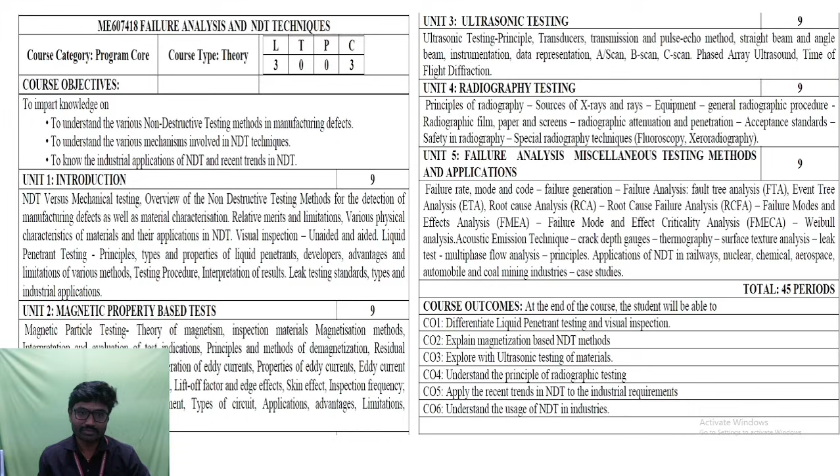Next we'll move on. First of all we'll cover the basic concepts in non-destructive testing, as well as the types of non-destructive testing. In this session we'll focus on two important testings, and in upcoming sessions we will go further by learning other types too. Okay, let's move on to the class.

So what is non-destructive testing? From the word itself we can easily understand it's a testing we do without causing any damage to the material. Mainly these testings are used to evaluate the quality, the integrity, and safety of material components or welds without causing any damage. This is important because mostly we have destructive or mechanical testings, but by overcoming those and as an upgradation, we have non-destructive testing, which we can do without any disruption or damage to the material.

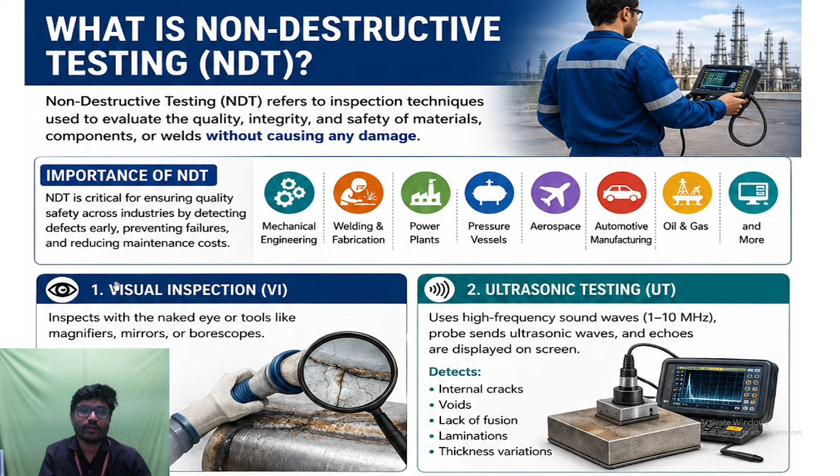This is used in power plants, pressure vessels, aerospace, automotive manufacturing, oil and gas, and many other applications. So mainly, as I told, we are going to focus on the types.

The types we are going to see: first is visual inspection. This is one of the simplest and most economical inspections in NDT, done with the help of our own eye or tools like magnifiers, mirrors, or borescopes. We'll see all these types in detail in upcoming slides, but just presenting them briefly now.

So first we can see visual inspection. From the word itself, we can easily understand that visual inspection deals with our own eye, checking the cracks and pores and how much extension has happened.

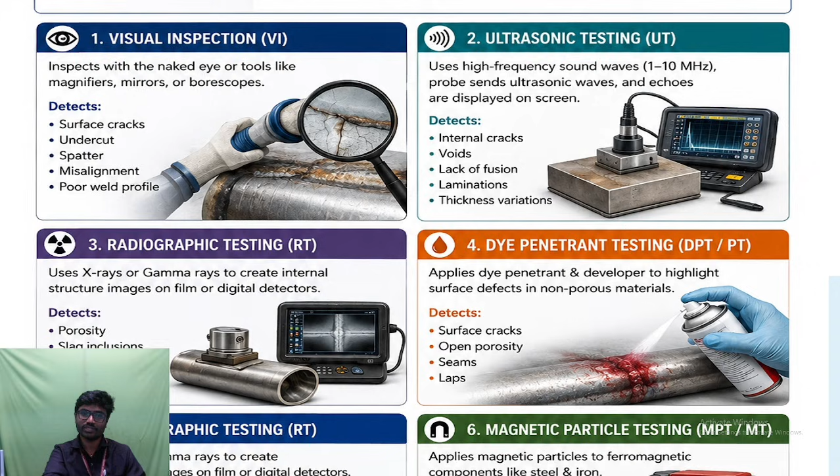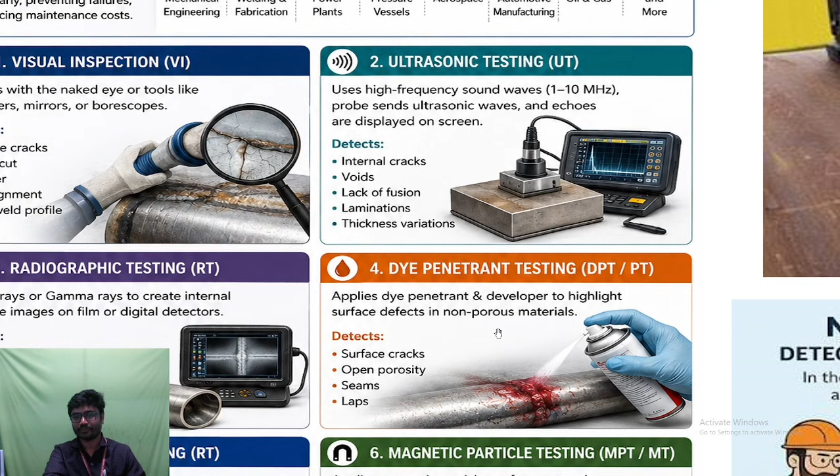So the next type we can see is dye penetrant testing, or we can say liquid penetrant testing - that's the other name for dye penetrant testing. These penetrant testings also we can do similar to the other techniques. Here we are applying some dyes as a liquid penetrant, like the spray you can see here. This is a welded part, and we are applying the spray, and with our naked eye we are seeing any pores or cracks or defects present in this particular welded component. We will see this dye penetrant testing as well as visual inspection testing in detail in the next slides.

Try to understand, we have different types of testing which can be used for different purposes. If you are going for in-depth measurement, like cracks or pores which are not visible on the surface, we can use ultrasonic testing and radiographic testing. If the pores or cracks can be visibly seen over the surface, we can go for visual inspection or use dye penetrant testing. So according to the usage or application, we can use either of the testings for getting proper accurate measurements. Magnetic particle testing is the next testing we are going to see.

This we can understand simply with the help of the word itself - magnetic particle testing. With the help of the magnet, magnetic flux, and magnetic particles, we can detect cracks or defects in the material. This method, magnetic particle testing, can be done only in ferromagnetic materials, not in all components, since the magnetic flux or magnetic field plays a major part. This is one of the disadvantages - we can use it only on ferromagnetic materials.

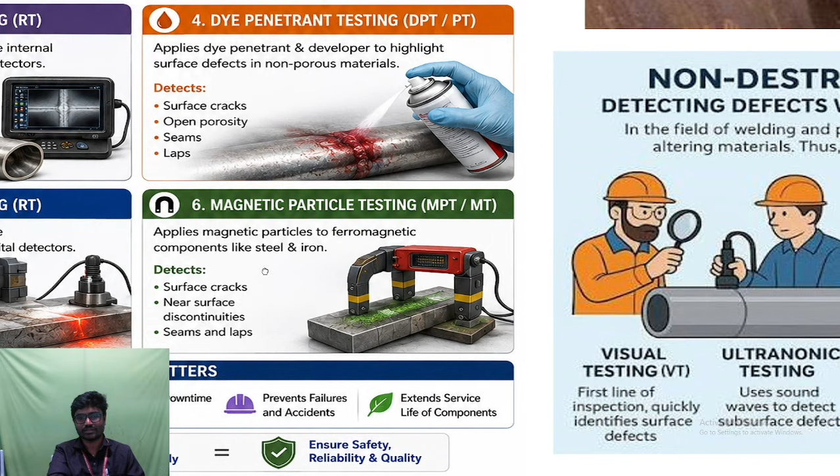So we need magnets and magnetic particles. Sometimes we will use fluorescent particles also for getting much more visibility with the help of UV lights, and we can visualize the cracks or pores in a very accurate way. So for that we use fluorescent particles instead of magnetic particles. These are some of the types of NDT.

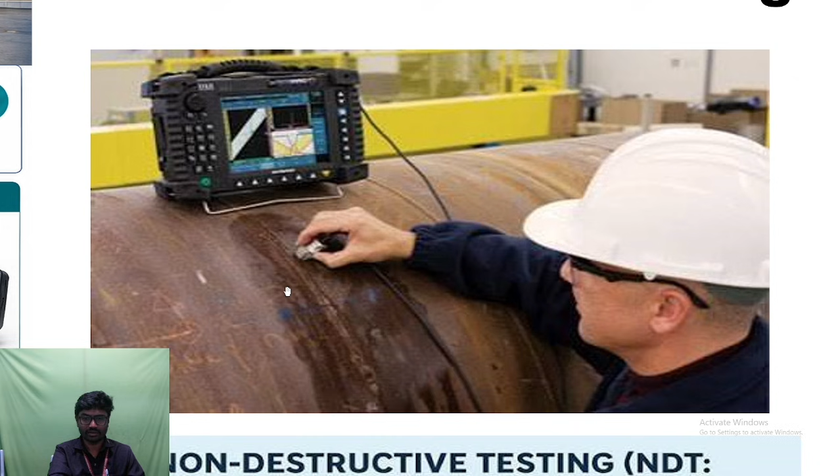Here you can see the example - it's a huge pipe, and there we are detecting with the help of ultrasonic testing. They are using a probe to send ultrasonic waves into the pipelines or metal component. Here you can understand the display is showing every movement of the peaks, how any cracks are present. If the crack is present, the peak will be very high, or the peak distance will be very high. With the help of that, we can understand some crack or defects are present in the component.

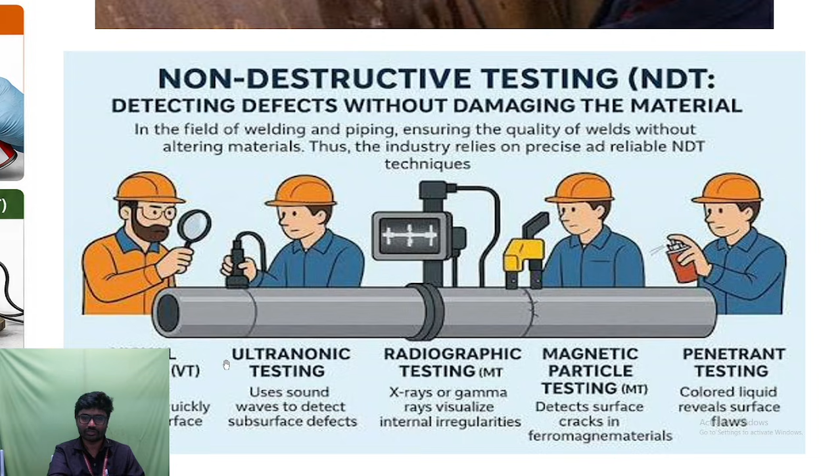So some of the testing we have discussed. As a summary, I can say we have seen visual testing, ultrasonic testing, radiographic testing, magnetic particle testing, and dye-penetrant testing. So I'll move on to the next slide.

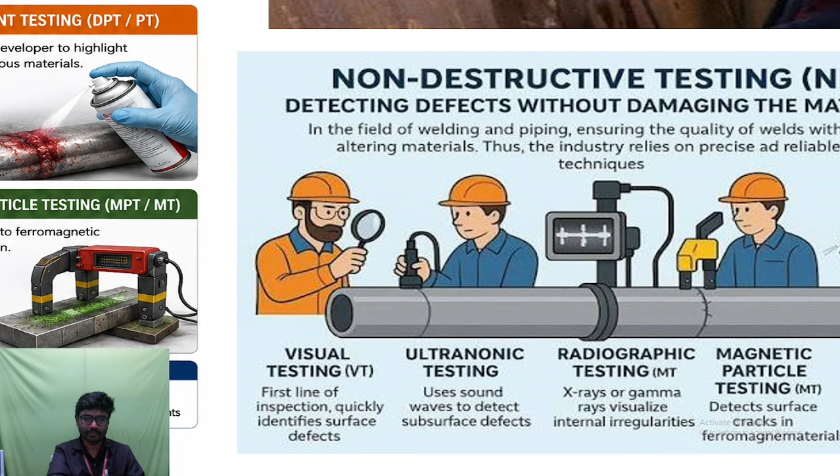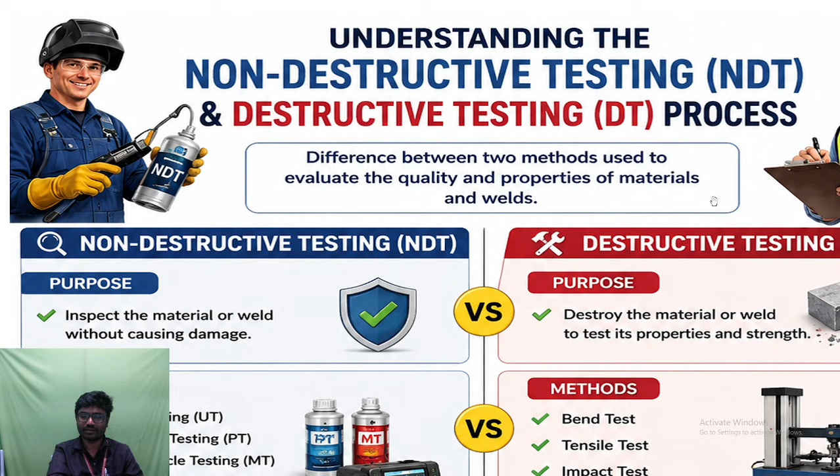So we'll see now what is the difference between mechanical testing and non-destructive testing, or either name we can give, like mechanical testing can be called destructive testing too. What are the differences? We can see one by one.

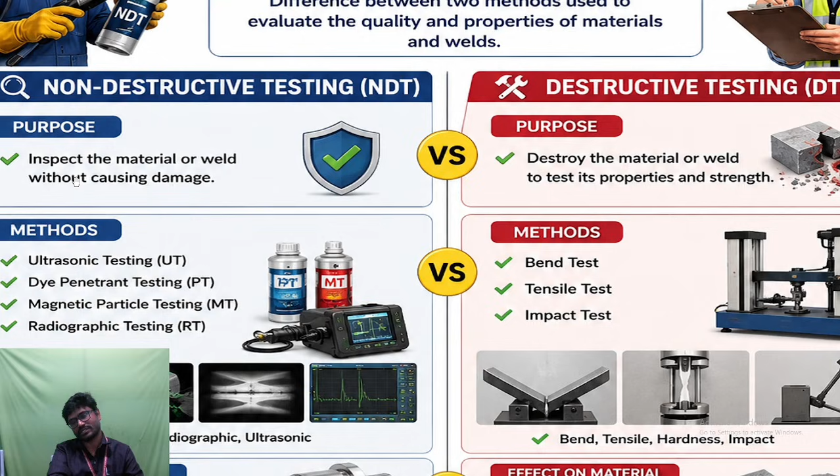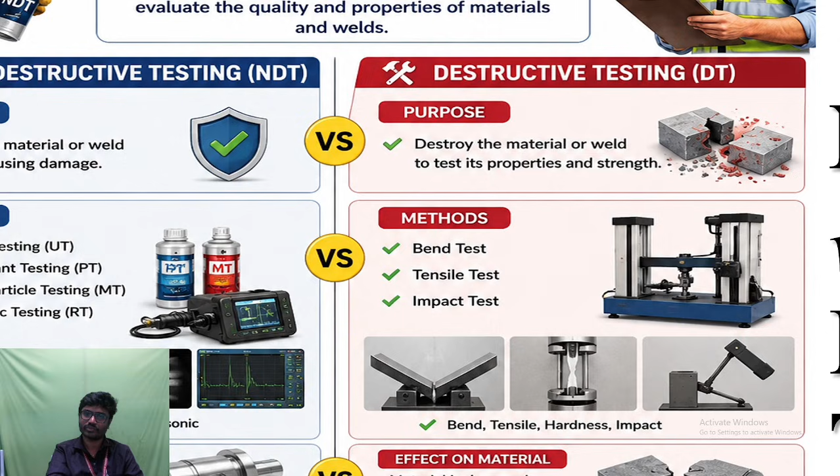Non-destructive testing inspects the material or welding component without causing any damage. But destructive testing is where the materials are damaged and we can detect any defect, why the failure occurred. That is done with the help of destructing or damaging the material. That is the main drawback in destructive testing compared to NDT.

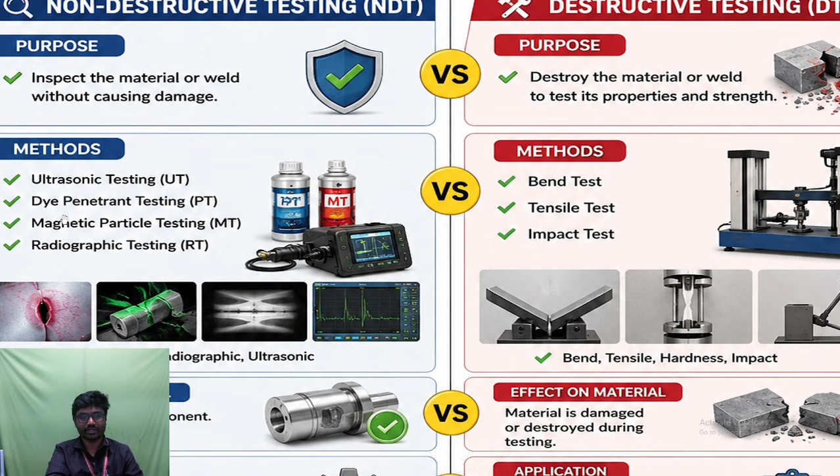What are the methods? We have seen different methods or types involved in NDT: ultrasonic testing, dye-penetrant testing, magnetic particle, and some other testings. Now you can see the methods involved in destructive testing.

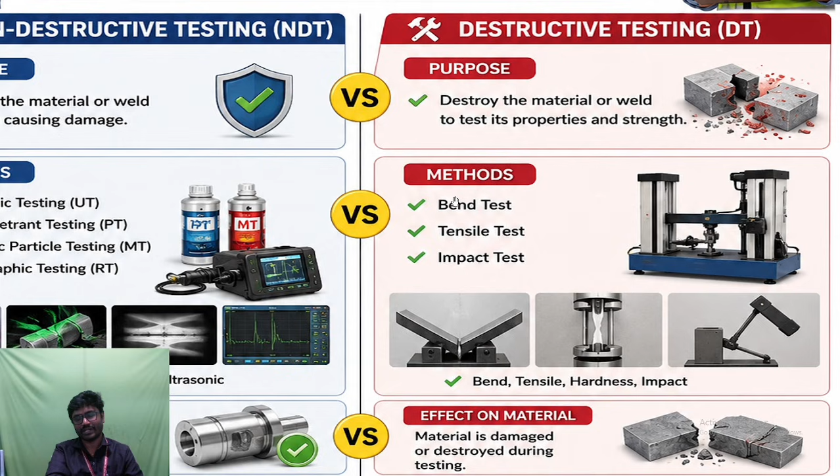Actually we study all these things in strength of materials, especially bend test, tensile, impact, everything. Here you can see the material and the force or load which is applied over it, to check the material properties, whether the material can hold this much amount of load or not.

With the help of that, we can use it in different applications. Strong materials can be used in high load application places, and low strength materials can be used for different purposes.

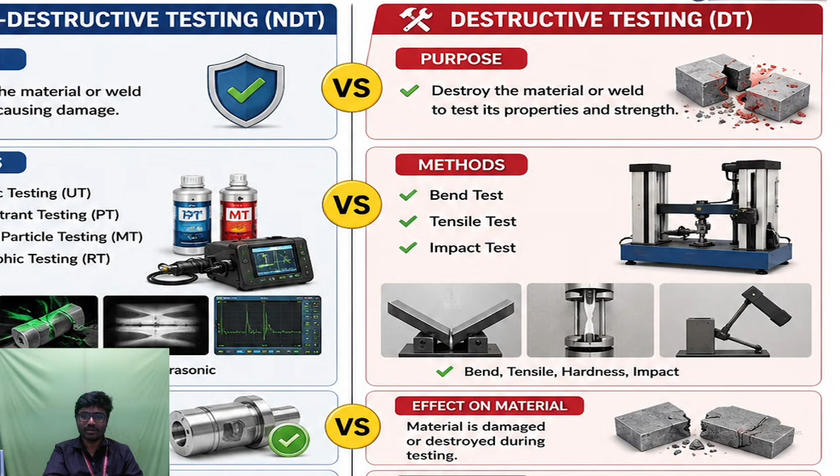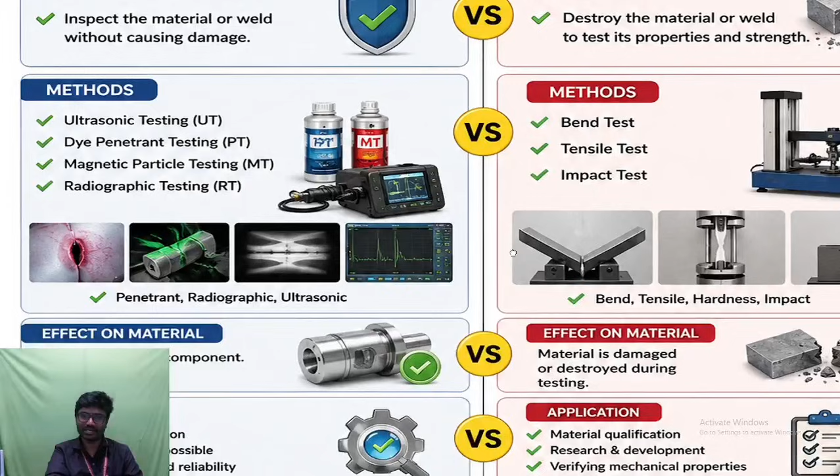So lightweight materials, tensile materials, crack, brittleness, and so many testings can be done in mechanical testing. But all those testings are done by damaging the particular material. That is the difference between NDT and mechanical testing.

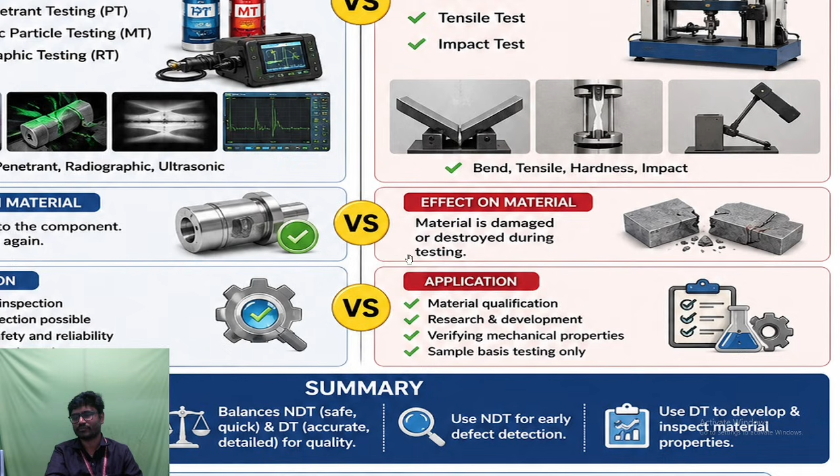In effect, with NDT there's no damage to the component so it can be used again, but with mechanical testing the material is damaged and destroyed during the testing and we can't use it again. So we need to decide whether to use mechanical or NDT testing based on the material's importance.

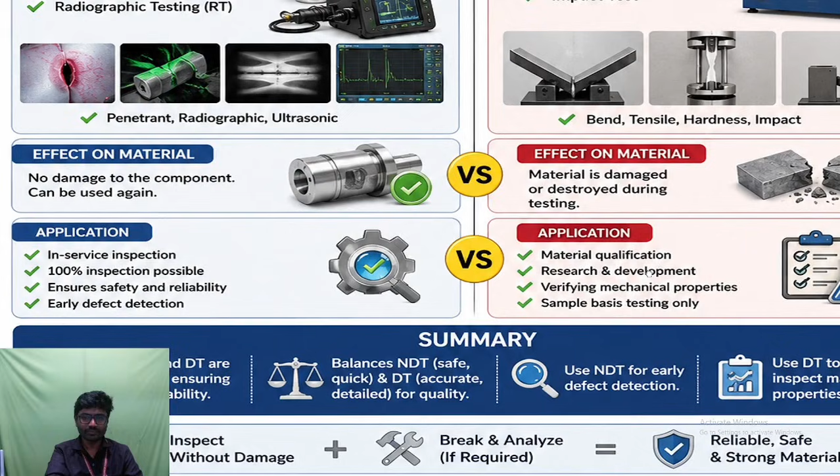For application, we can say in-service inspection, while going for inspection, safety and reliability, and early defect detection use NDT. For material qualification and research and development, they will use mechanical testing.

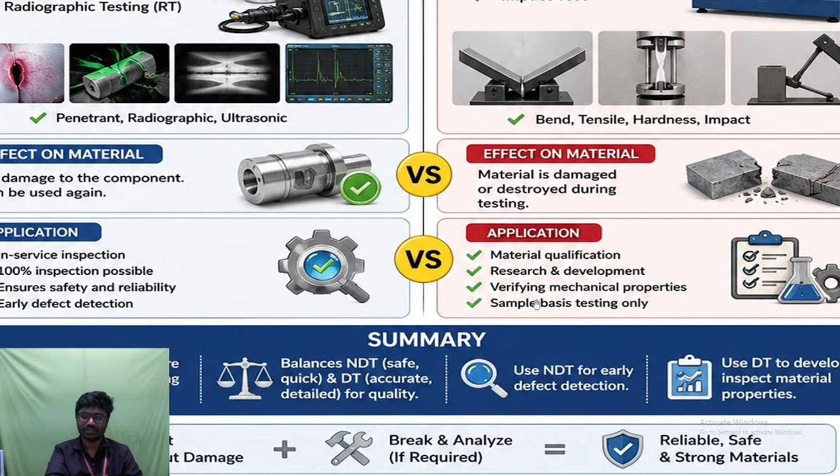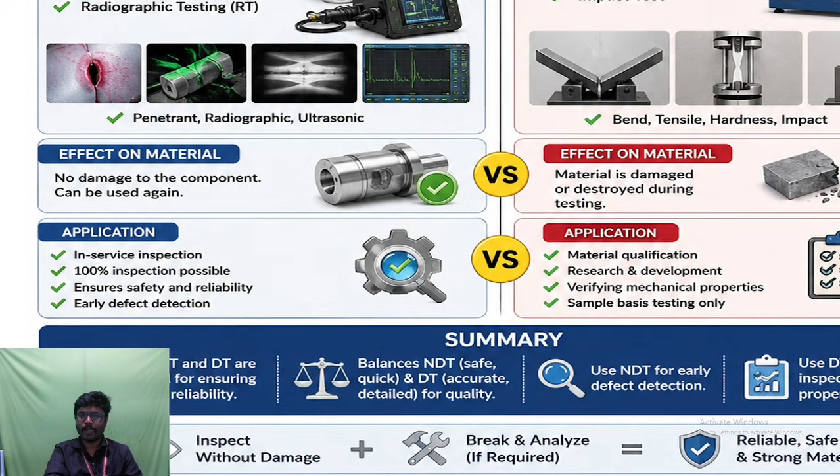Both testings are very needed, and we can't say mechanical testing is major or should not be involved, because mechanical testing plays a major role in finding material properties compared to NDT. While applying the load and breaking the system, we can see the fatigue nature, how much load a particular material can withstand.

So we want a balance in using NDT as well as destructive testing, deciding where to use DT and where to use NDT. Balance is needed: NDT is safe and quick, but DT will give accurate, detailed measurements for quality.

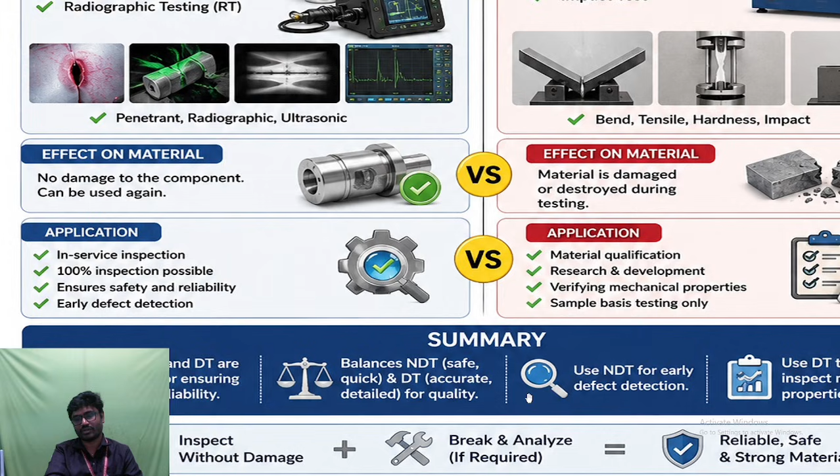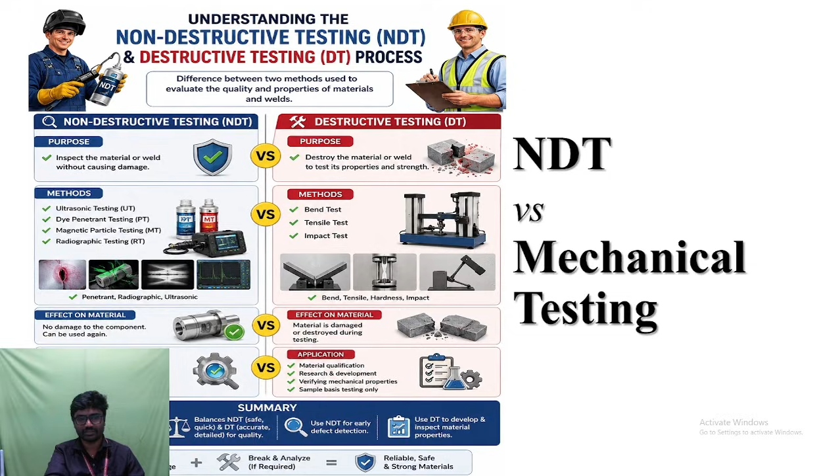So I hope you have understood the mechanical and NDT techniques and the difference we have seen here. Now some videos I have downloaded from YouTube for understanding in a better way, we'll see them one by one.

This is one of the testings they are doing, ultrasonic testing. Here you can see the pipeline, the huge size of the pipes which is underground, and they are digging and measuring how much weld quality they have done earlier with the help of ultrasonic testing. This type of testing can't be done in mechanical testing because we can't break the system and check the measurements for understanding the failure. These testings are very much needed while applying in real-time applications, and play a major role, a high factor, in oil and gas industries and pipeline industries using this type of NDT technique.

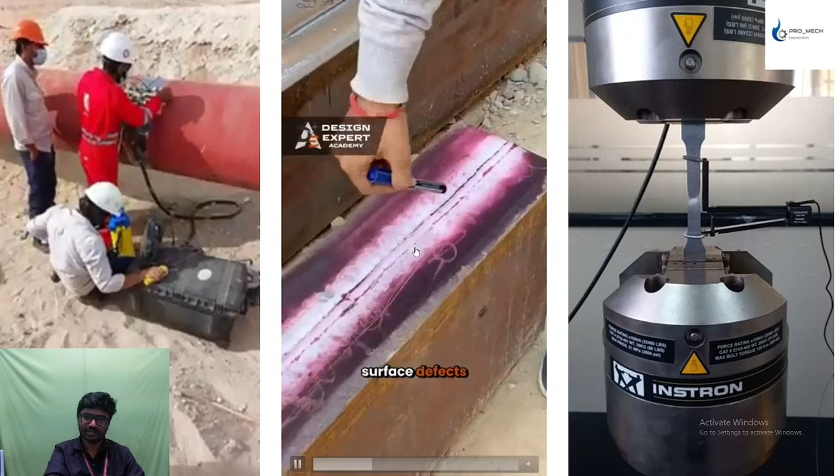So next testing we can see is LPT, nothing but liquid penetrant testing or dye penetrant testing. Here you can see they have welded the component, and after joining the component, they are testing whether the component was placed very properly or any damage is present.

So here you can see that the dye is applied over it, and they are verifying visually whether any damages, cracks, or pores are present. Because now itself here you can see a pore, we can able to detect these parts, meaning the lifetime of the system can be increased. So for that we need this type of studies.

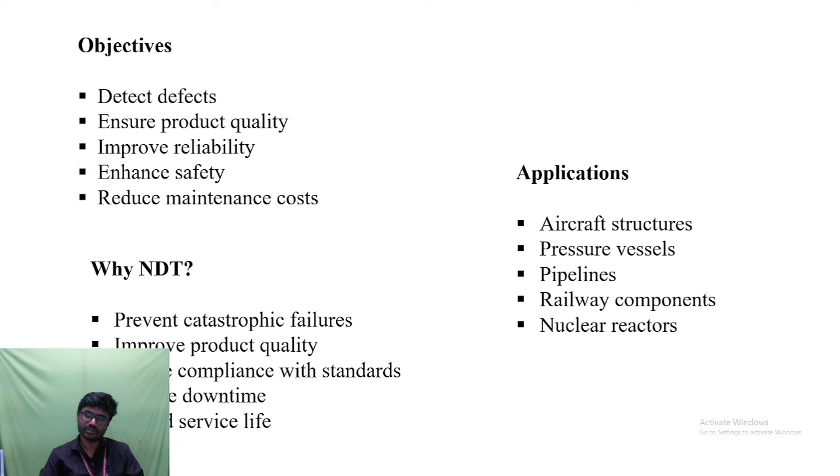We have seen the applications, the similar applications we can see, like aircraft structures, pressure vessels, pipelines, railway components, nuclear reactors. So all these applications we can use the NDT.

So advantages and disadvantages. NDT advantages: it's non-destructive, we are not damaging the components, and we are measuring mainly the defects, and it is cost effective. It's not high cost, but it's costly compared to the market while checking the testings. While testing the material defects, it's most cost effective, and because we see visual testings, LPT...

Some simple testings like these are very cost effective compared to UT and radiography, but magnetic particle testings are also cost effective testings. We can go for it.

Portable equipment available. All equipment we are using in NDT are easily portable, and there is no need for giving traveling cost for it. As a human, we can easily take the equipment in our hands, and we can go wherever the testing is needed, and we can able to get it done.

Early defect detection: the defects can be detected earlier without any time delay before this goes to failure. So early detection is possible while applying NDT. It's a real-time inspection. We don't want to remove the parts or the component from the system for detecting the defects. We can use it in real-time inspection while the machine is under working. We can able to stop it, and we can able to measure the main thing we want to measure, to check whether the machine is working correctly or not.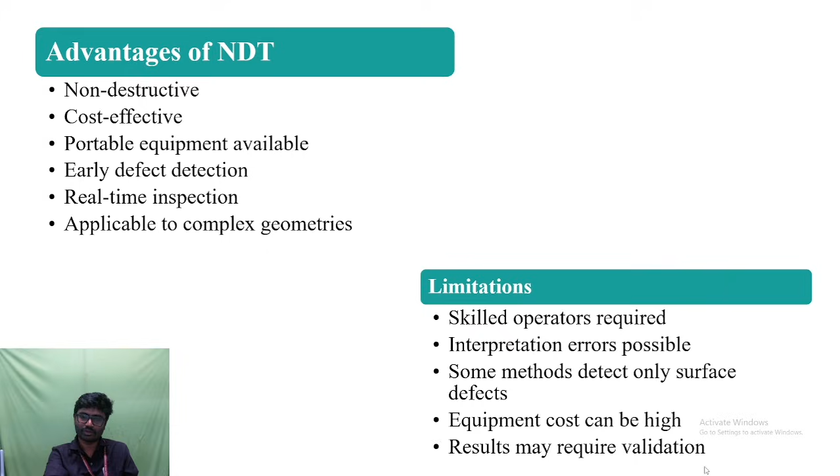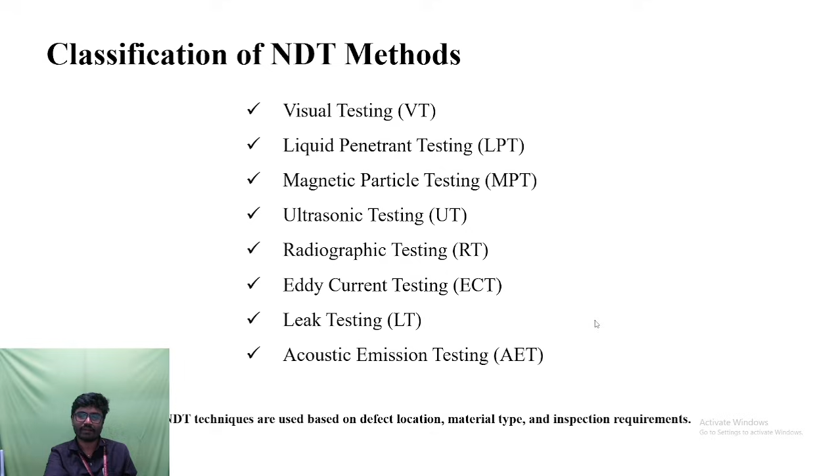Results may require validation - validation should be required after confirming the NDT data. So we have already seen the classifications like visual testing, liquid penetrant testing, magnetic particle testing, ultrasonic, radiography, and other testings like eddy current, leak testing, and acoustic emission testing. These testings can be done under NDT techniques, completely based on defect location, material type, and inspection requirements.

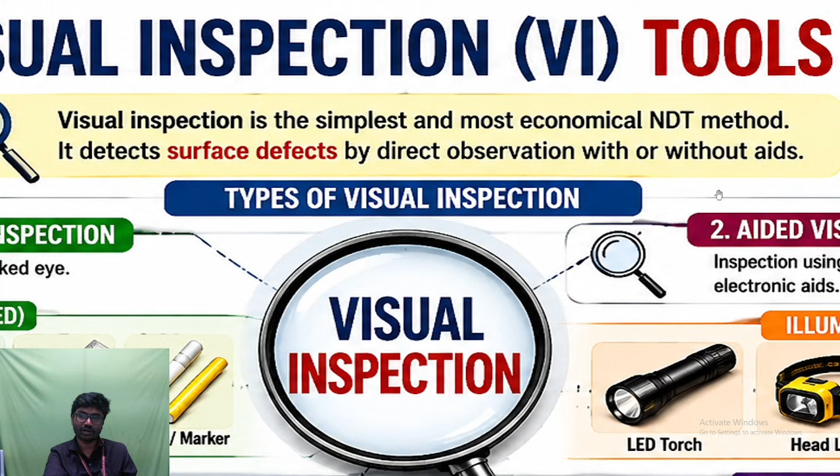So visual inspection is the simplest and economical type of NDT method. It detects surface defects. It can't measure in-depth defects, but it can detect surface defects by direct observation with or without aids. So these are some types of visual inspection.

So we are having two types. One is unaided visual inspection, another is aided visual inspection. I am going to compare these two. Unaided visual inspection is nothing but without any tools, we use our naked eye to find if any defects are present or not.

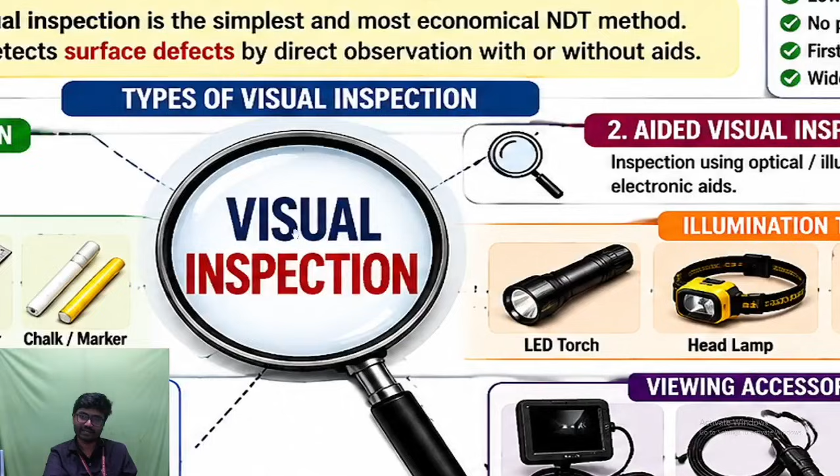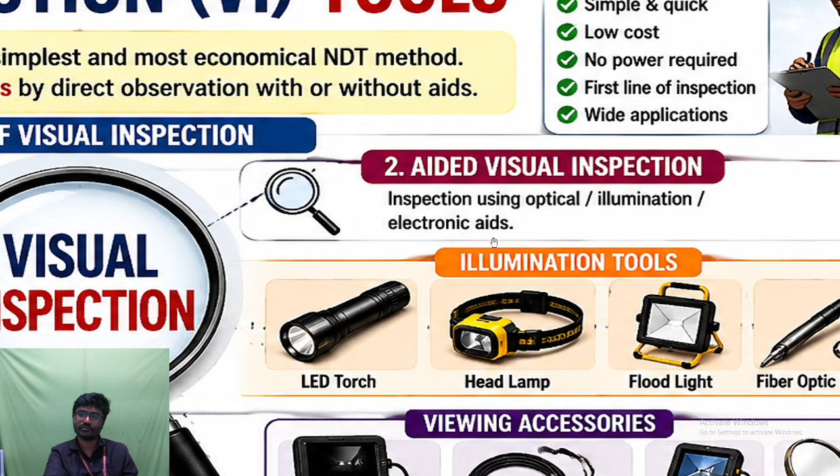Second thing is aided visual inspection. Here we will use some tools to measure or to clearly visualize what is there exactly in the particular location for finding the defect. We will use some tools, so those will come under aided visual inspection.

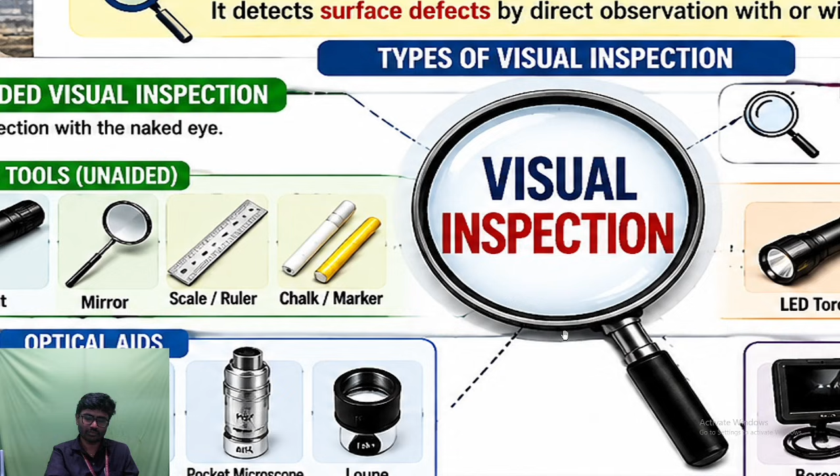We will see some of the tools. Basic tools in unaided inspection are our naked eye, flashlights, and mirror. These are simple tools, we don't want complex tools. Flashlights we use in dark places to visualize the defects. Mirrors are used to find or magnify the defect to see it clearly. Scales and rulers to measure, and chalk to mark. So all these are some unaided low tools to measure, with the help of NDT as a visual inspection type.

And second is aided visual inspection. We have LED torch, headlamps, floodlights, fiber optic lights to exactly locate and measure the particular defect present. Some optical aids like magnifying glasses, hand lens, pocket magnifier are in unaided parts, but here you can see the exact aided tools like borescope, fiberscope, videoscope. All these are utilized however, similar to how we use them in medical fields, we use them in NDT also.

A similar body inspection is compared with - we can compare body inspection to material component inspections. You can see we can use this borescope, we have a camera so we can insert this fiber into pipes and see whether any defects are present. Similar to borescope, fiberscopes or videoscopes also play the same role.

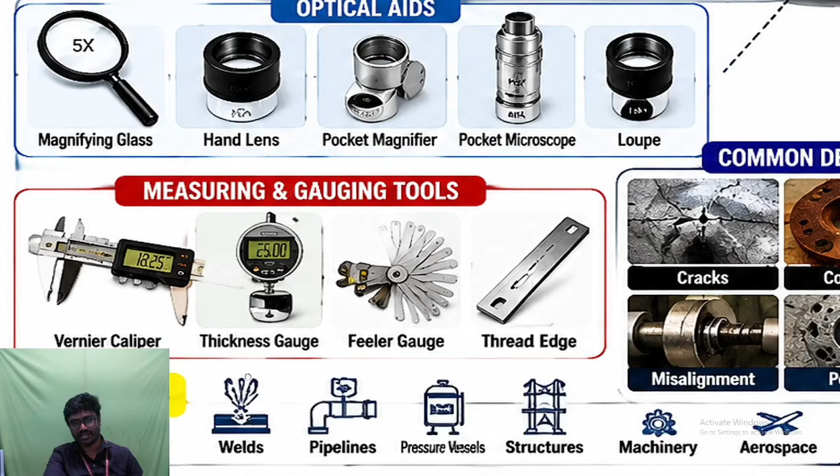Measuring gauges, we use vernier caliper to measure how much the defects and the thickness of the gauge - everything we do with the help of these tools. Here you can see we can detect with the help of camera, smartphones, inspection mirrors, and measuring tape in aided inspections.

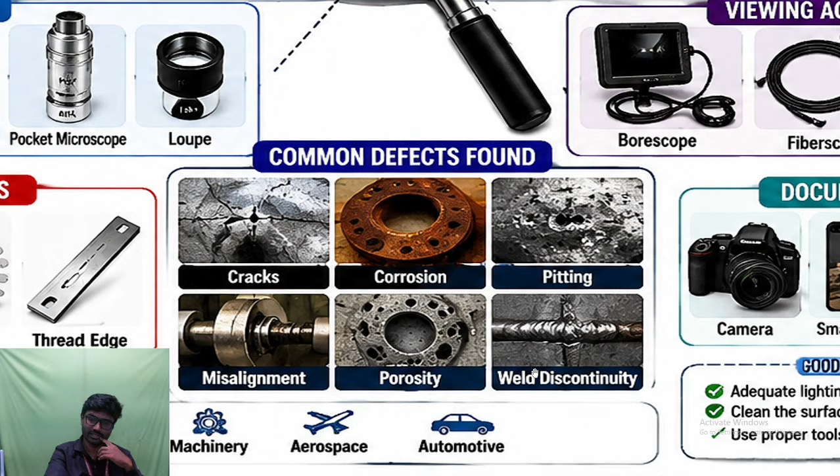So common defects, you can see here, cracks are present. We can easily visualize with the help of our naked eye and say some defects are present. Likewise, we can see corrosion, pitting, small pores or holes in the surface, misalignments, porosity, and weld discontinuity. Everything can be done by using visual inspection itself to find defects, and we can resolve it after finding how much the defects were.

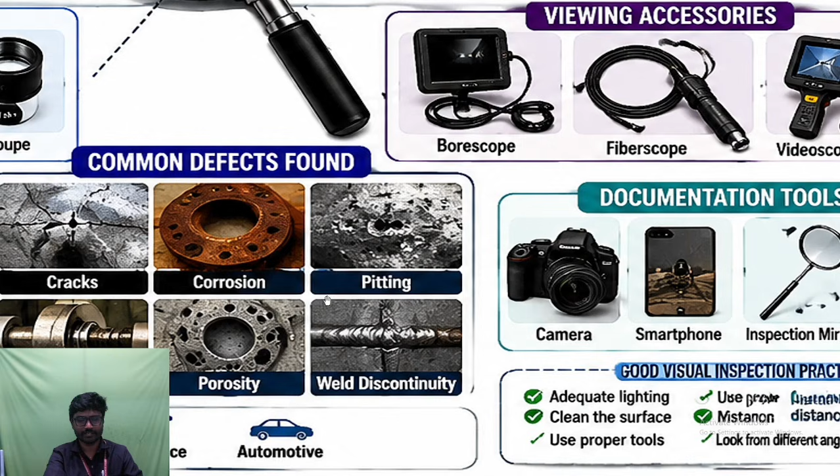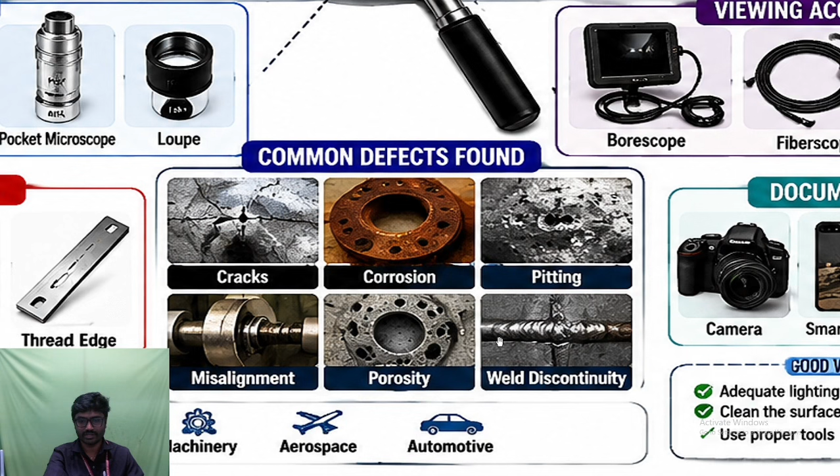So these are some of the visual inspection techniques we have. These are used in welds, pipelines, pressure vessels, structures, machinery, aerospace, and automotive industries. Simple advantages: it is simple and quick, low cost, no power required, first line of inspection, and has wide applications. So these are some of the things we can measure with the help of visual inspection in this technique.

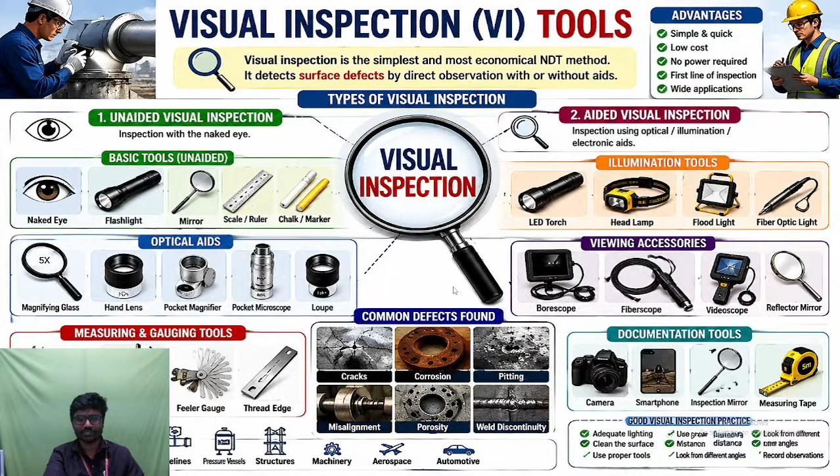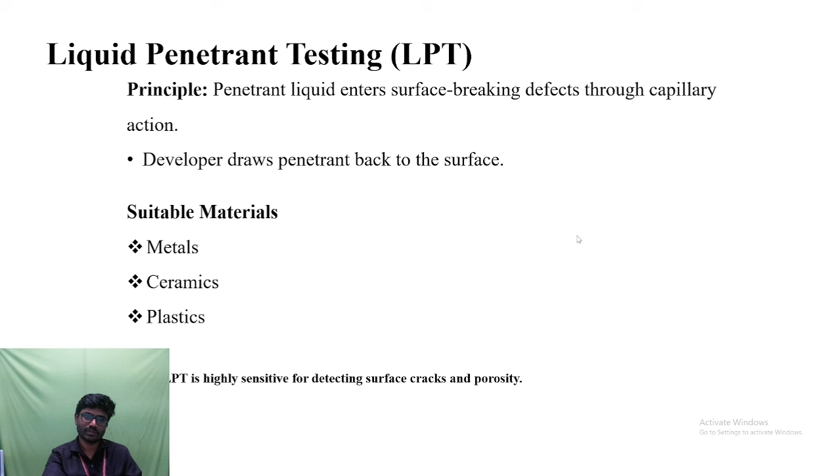We can move on to next slide. This is our final topic we are going to discuss here - liquid penetrant testing, LPT. As we know from the word itself, we are going to penetrate some liquid over the surface and measure it. As we've seen in the video, we are spraying some liquids over it for finding defects in that particular system. I have consolidated this into a single slide with the help of an AI tool. We are going to visualize the liquid penetrant testing, how it works, its procedure and flow diagrams - everything we'll see one by one.

So here is a simple definition for liquid penetrant testing: it's a non-destructive testing method used to detect surface-breaking defects in non-porous materials. In porous materials, we can't use this LPT. You know the difference between porous and non-porous - in porous materials, if you are using LPT, the liquid will flow over the complete surface, showing defects everywhere if you use LPT as a technique. But in non-porous materials, it's an exact smooth surface.

The surfaces should be very fine and smooth, so that this LPT will give accurate and precise defect locations. But in porous materials, we can't use liquid penetrant testing.

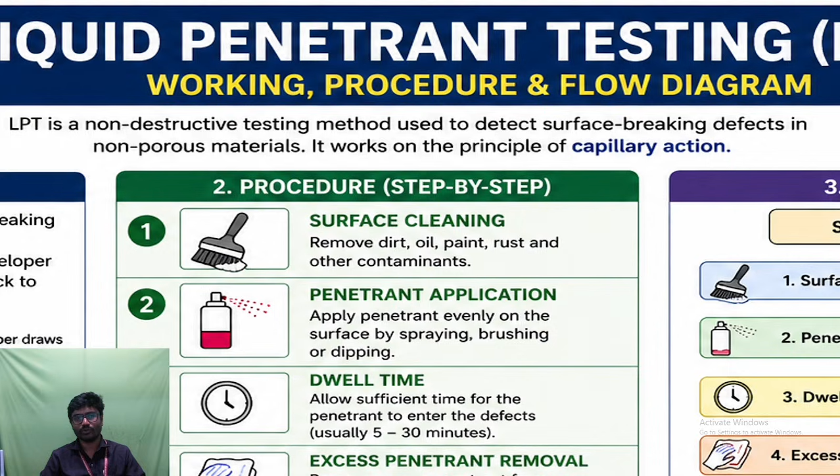As we know, the basic principle behind liquid penetrant testing is capillary action. We've gone through fluid mechanics, so we know capillary action is nothing but a spontaneous movement or flow of liquid in compact pipes or surfaces against gravity. This gives the principle of liquid penetrant testing, so capillary action plays a major role—the spontaneous movement of liquid in compact pipes or compact places against gravity. That is very, very important.

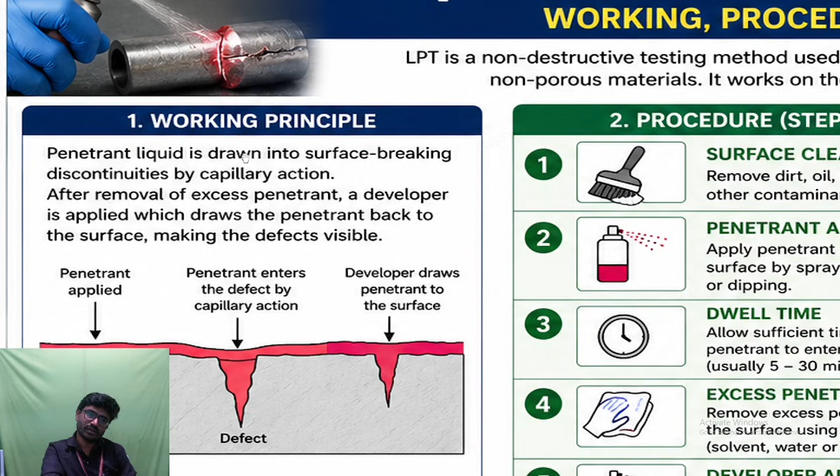The capillary action happens based on this basic principle—liquid penetrant drawn into the surface breaking. For example, if you look at a surface, you can see some defects present. During application of the liquid penetrant, the penetrant will flow, and because of capillary action, wherever compact locations or small gaps are present, it will flow quickly and spontaneously into it, occupying the space of the defect, the gap or depth of cracks present. From that, we can identify how much depth or resolution is needed to bring the surface back to a smoother condition.

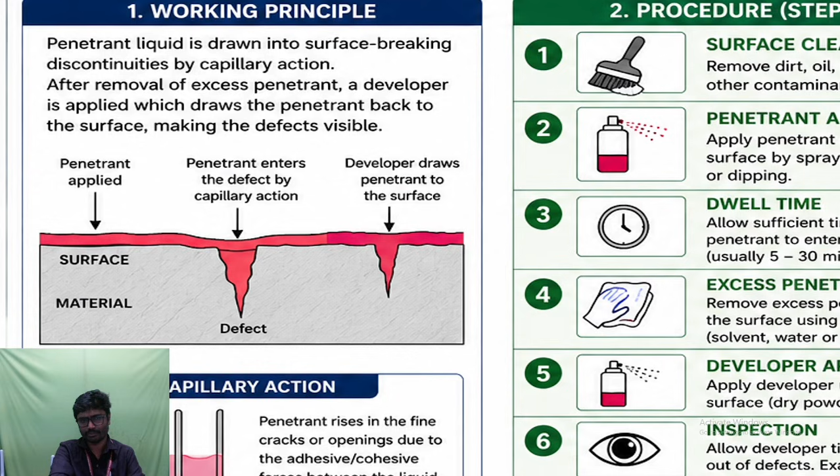So this penetrant liquid is applied over the surface and passes over the defects very quickly under capillary action, and then we flow the developer over it. Penetrant is one type of liquid, and developer is something like a powder, or in the form of a powder or solvents or liquids. After application of penetrant, we apply the developer, which will easily grab or attract the penetrant, giving exact visibility of how far the defects have occurred. So penetrant and developer play a major or significant role in liquid penetrant testing. Now we'll see the procedure and how capillary action works.

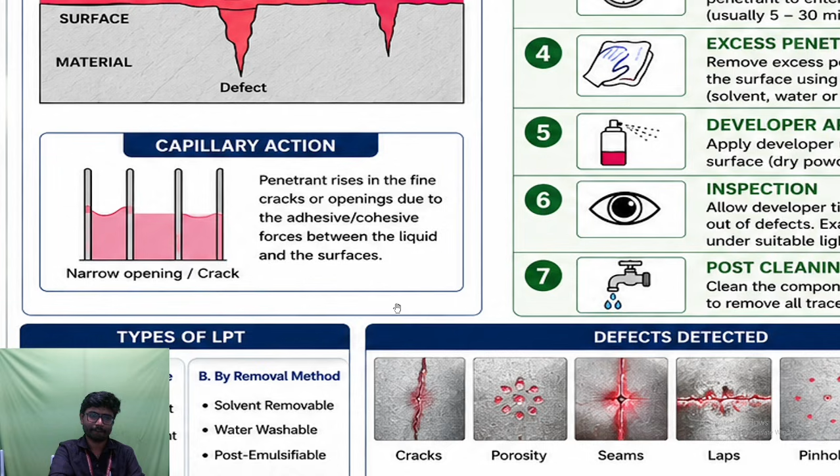Capillary action can occur in two ways: adhesive and cohesive. Cohesive is nothing but the liquid molecules themselves attracting each other and moving forward. Adhesive is the liquid particle plus the nearby solid particle attracting each other, creating the capillary action. When liquid molecules alone create the capillary action, we call it cohesive. Adhesive means both the solid surface and the liquid surface cause the action together. These are simple basic principles we already know.

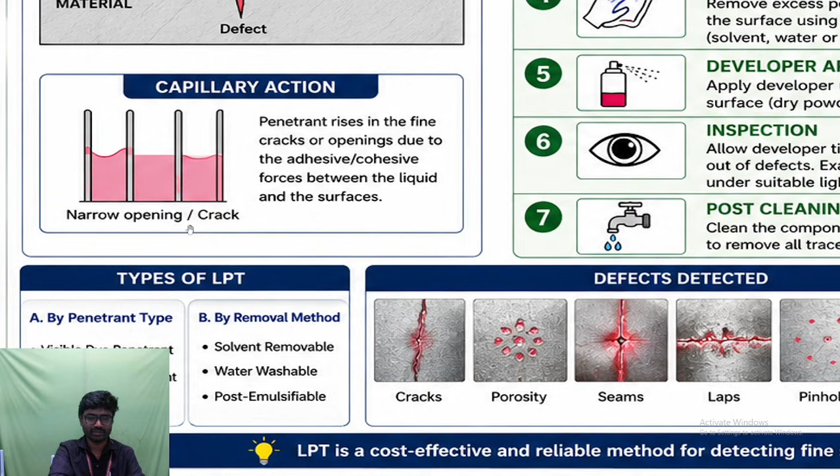We will form a meniscus, either concave or convex, and there are calculations and equations to solve that, but we don't want to go into that depth. We'll see next.

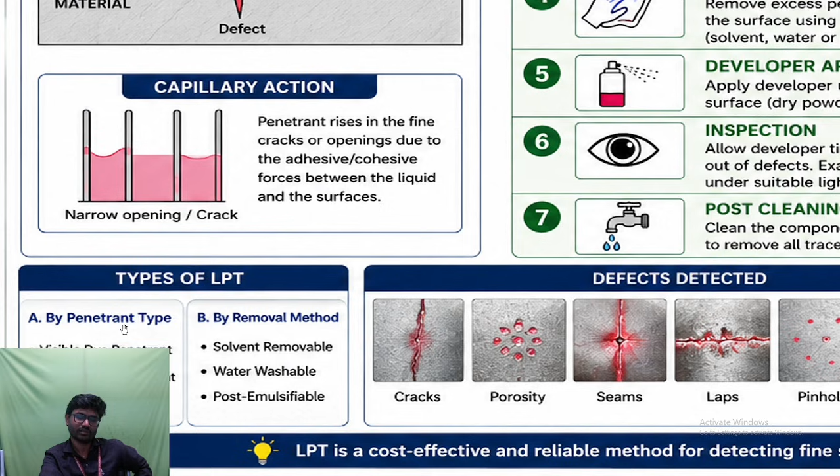We'll see the types of LPT. By penetrant type, we have two types: visible dye penetrant and fluorescent penetrant. Second, by removal method, to remove the penetrant and developer we use the solvent removal method, water washable method, or post-emulsifiable method. This is based on the materials and locations we are working on, so these types may vary. Both visible dye and fluorescent penetrants play a major role in applying liquid penetrant testing.

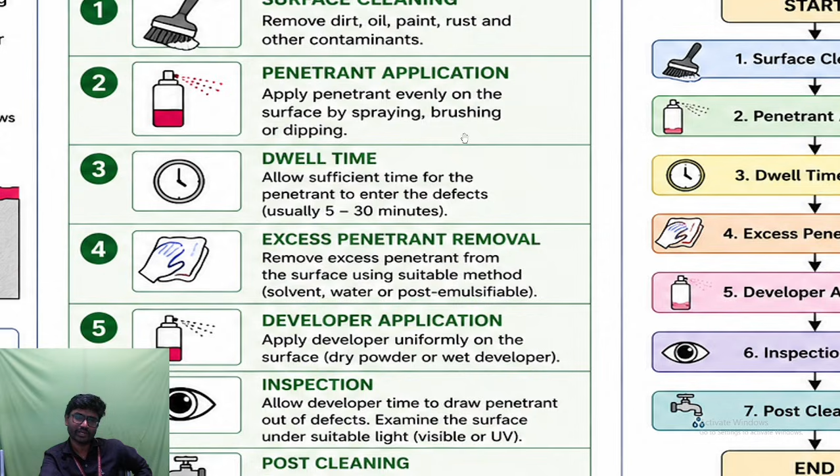The procedure we follow is: first we clean the surface, removing dirt, oil, paint, rust, or other contamination present. We clean the surface first, then apply the penetrant. As shown in the previous video, for example in welded applications, the penetrant is applied evenly over the surface by spraying, brushing, or dipping. After that, we give some time for the penetrant to spread over the entire surface so that wherever cracks are present, it goes into them and coats them.

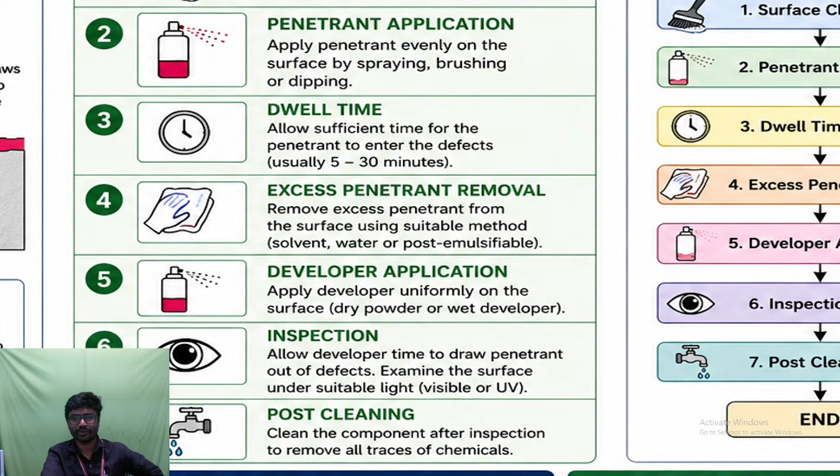We want to give some time for it to cure over the surface—that time is called dwell time, typically 5 to 30 minutes.

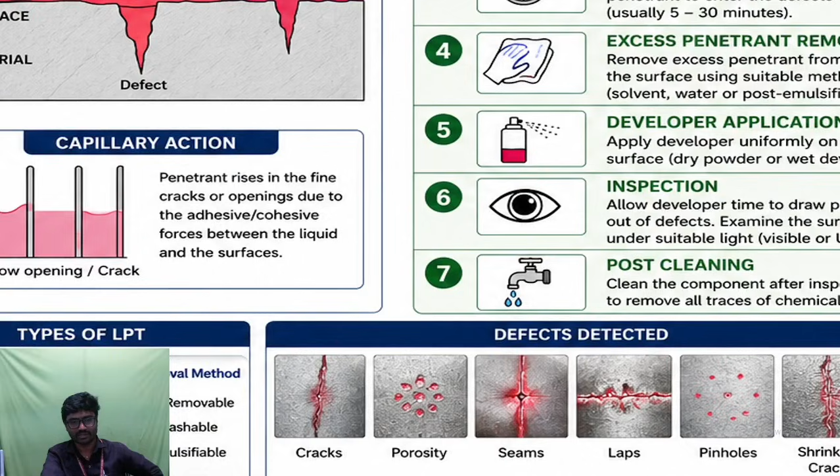After that, we will remove excess penetrant with the help of some suitable removal methods, like solvent removal, water removal, or post-emulsifiable removal. We will use some removers and remove excess penetrant which is applied over it, so that we can see the visibility of the crack very accurately.

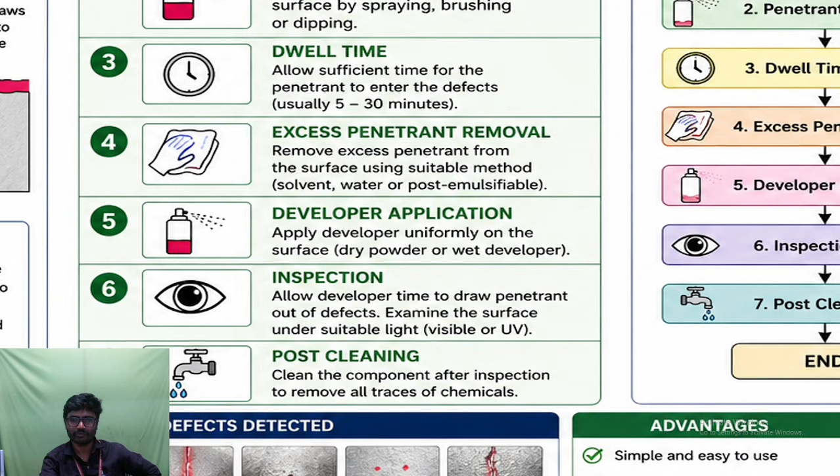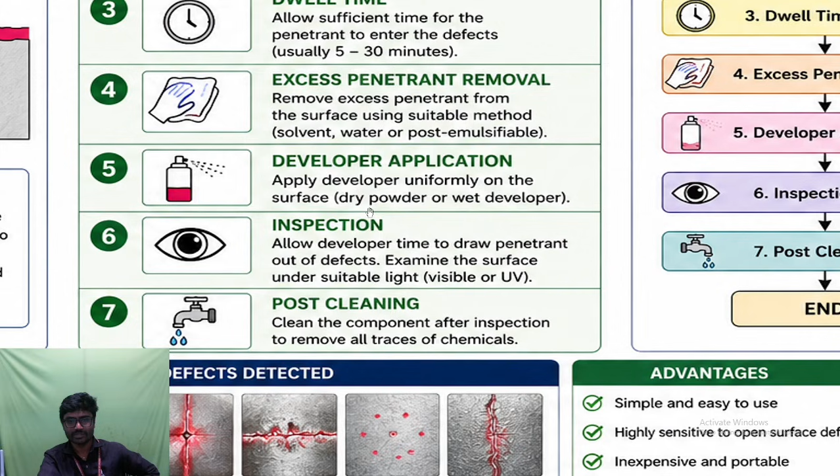For that, we want to remove it, and then we will apply the developer over it. The developer will highlight surface defects. It will showcase or make it possible to visualize very perfectly when applying a developer over the penetrant, so we can use either dry powder or wet developer over it, and it will attract the penetrant forward, making it possible to visualize very clearly the surface cracks. So next, inspection.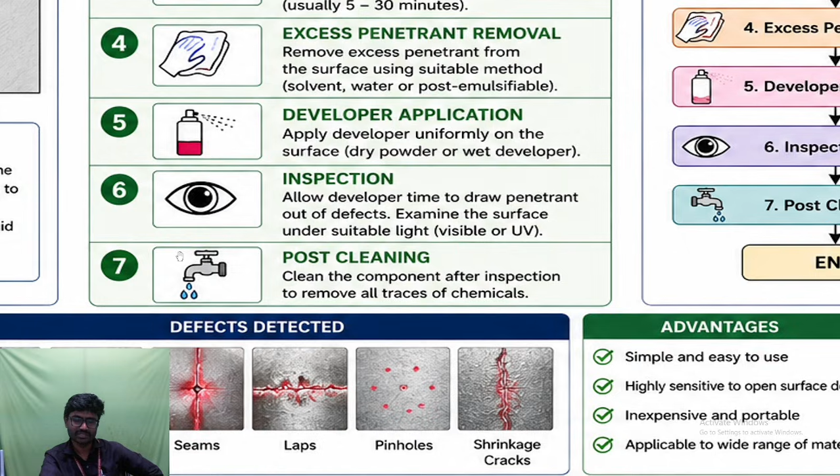After applying developer, we will go for inspection over the complete surface, checking whether any defects are present, through the help of our naked eye, or using UV lights. If you are using fluorescent particles as a penetrant, these UV lights are very helpful for visualizing defects in a very fine way. Next is post cleaning.

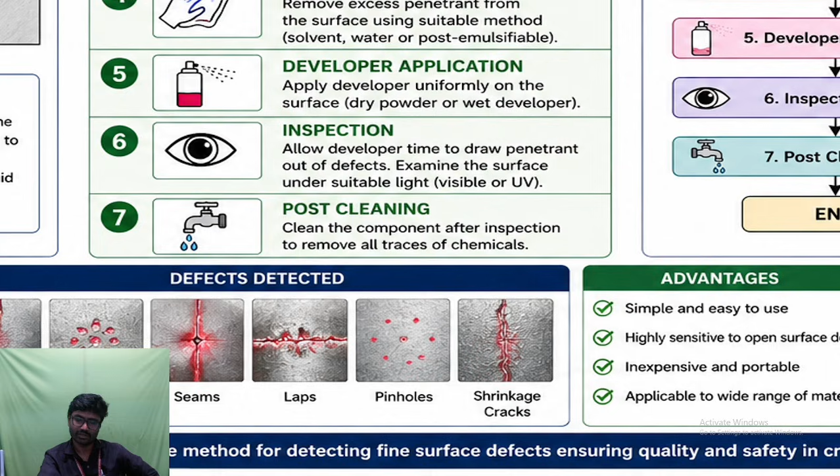After completion of the liquid penetrant testing, you want to clean the component completely with the help of solvents, either water or some solvents, to remove the complete penetrant as well as developer. Because if we leave it as such, the penetrant and developer will etch the parts or the component, and it will create cracks or pores over it. So after completion of the application and the inspection, we want to remove all the developer as well as the penetrant by cleaning the components, which will reduce the etching or corrosion that can occur with the penetrant or developer we are using.

So here the defects are detected, like cracks. You can see clearly how it shows crack positions and porosity positions, and you can see seams, either in laps or pinholes, or we can measure shrinkage cracks. Everything can be detected with the help of LPT.

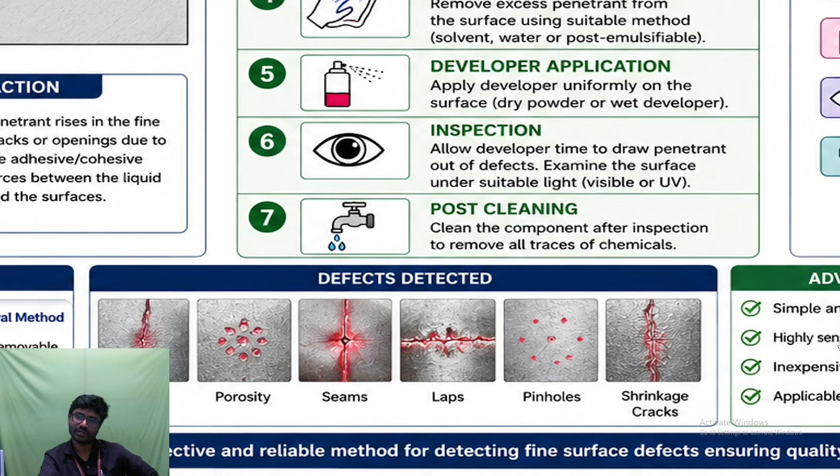So these are some of the flow diagrams I have given, similar to what we have discussed in the procedure itself. Now, what are the advantages and disadvantages?

The advantages are: simple and easy to use, high sensitivity to open surface defects, so surface defects can be measured in a highly sensitive way compared to visual inspection. It's inexpensive and portable, so cost-wise it is very effective compared to other testing methods, next to visual testing.

It is applicable to a wide range of materials. So all materials can be used, but you can only use non-porous materials, not porous materials. That is the only drawback.

So here are some limitations. As I mentioned, defects can be seen only on the surface, not in depth. Only surface defects can be measured with the help of LPT.

The surface must be smooth and non-porous—very important. If it's porous, we can't measure it with LPT. It also requires thorough cleaning, because after completion of our inspection, as I mentioned earlier, these developers and penetrants may cause etching or corrosion, so complete thorough cleaning of the system after inspection is needed.

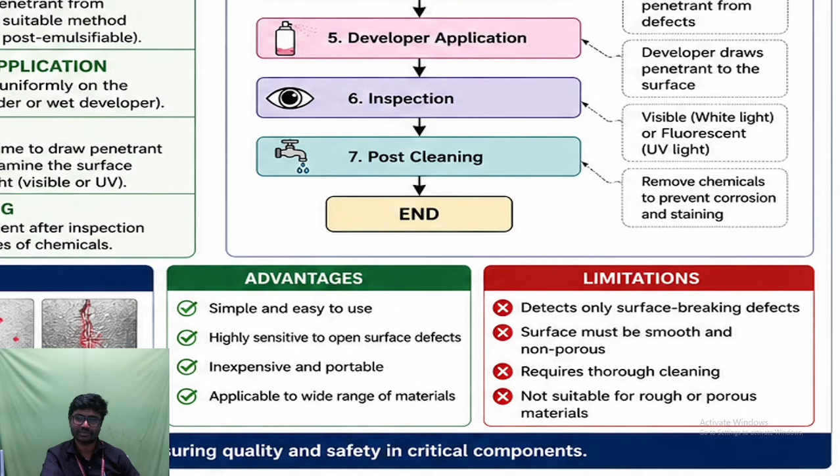It is not suitable for rough or porous materials. As I mentioned earlier, porous or rough surfaces can't be measured with LPT, because everything would appear as cracks or pores or something similar. So we want to use it only for non-porous materials.